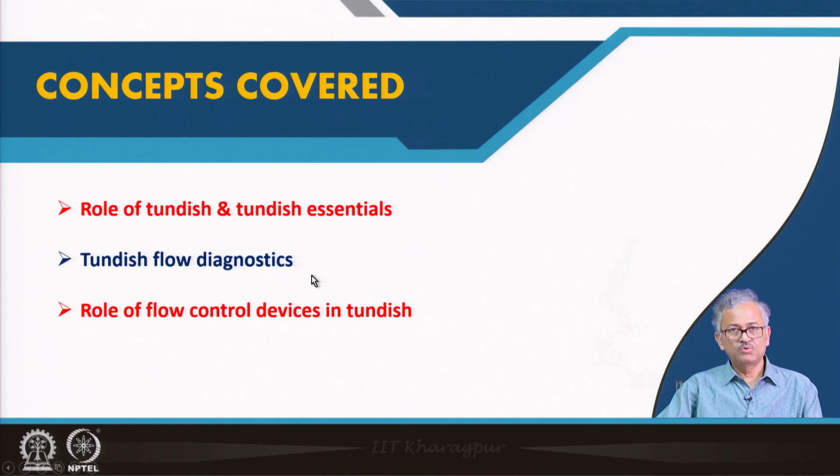The concepts I want to cover in this lecture are the role of Tundish and its essentials, Tundish flow diagnostics, and the role of flow control devices in the Tundish, because today Tundish is not only a receptor for the liquid metal, but it also has other functions like inclusion removal and providing the liquid at a constant superheat.

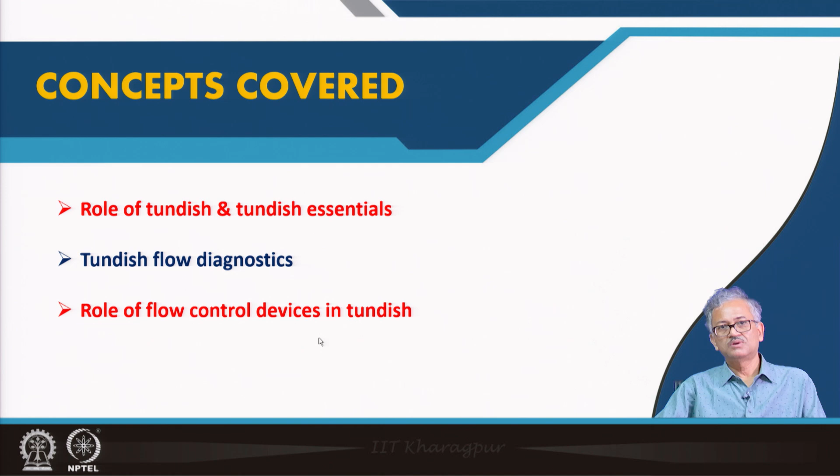So Tundish has now a new role because it is the last resort to remove the inclusions. That is why there are a lot of flow control devices in the Tundish, to control the flow such that we can effectively remove the inclusions.

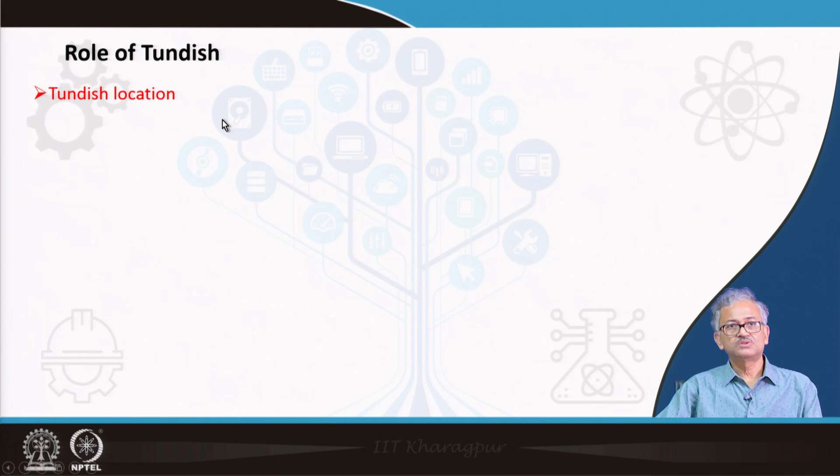So, the role of Tundish - as I said, first you see where the Tundish is located. Tundish is located basically between the teeming ladle and the continuous casting mold. It is in between these two that the Tundish takes place.

Why is the Tundish required? Because it is required to provide the liquid steel at a constant flow rate into the mold. If you change the flow rate, continuous casting - which is fixed with a constant heat extraction into the mold - will not be able to cast properly.

So flow rate should be constant, and that is why if you use the intermediate reactor, you can maintain the height of the liquid in the Tundish more or less constant. But if you directly feed the continuous casting mold from the ladle, the height level will change, and as a result the flow rate at the nozzle exit will differ.

That was the main idea - that is why the Tundish is used. Besides, the Tundish can feed a number of strands at a time. That is also another advantage of the Tundish.

But today the function of the Tundish is not limited to supplying liquid steel to multiple strands at a constant flow rate, but also to remove inclusions as much as possible, because it is the last resort, as I said, to remove inclusions from the steel.

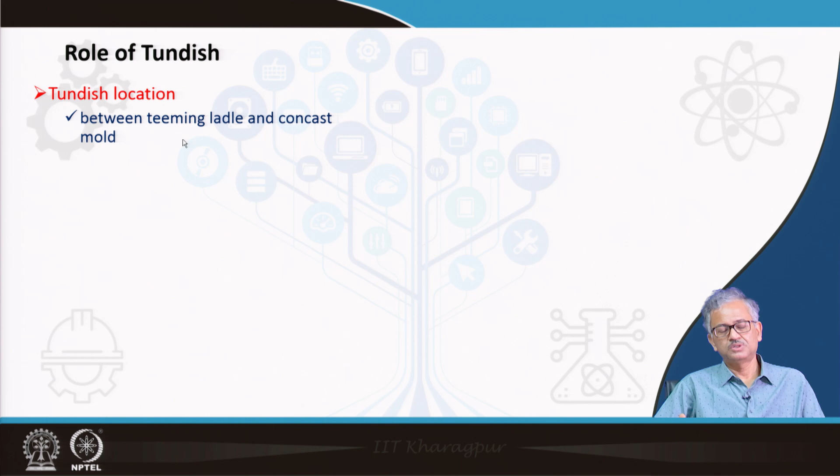Because if you have an open stream, there is a chance of air oxidation, nitrogen absorption, and all these things. This is essential because that will give rise to a lot of inclusions, and during casting a lot of precipitation will come - we do not want that.

That is why, after teeming steel, the inclusion removal station is only the Tundish, and after that it directly goes into the mold. So we have to be very cautious such that the liquid stream is not exposed to outside the inert atmosphere.

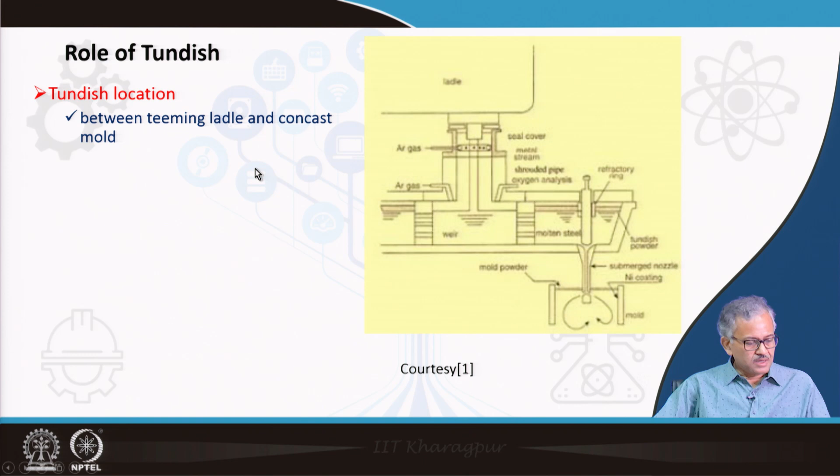So this is the Tundish. From the Tundish, you can control the flow rate to some extent by using what is called the Tundish stopper rod. I will come to that.

Now, that is the Tundish location we have talked about, and then the function is to maintain a constant liquid flow to the mold, as you know. For controlling the flow rate, besides the liquid height, there may be slight changes especially during the changeover of the teeming ladle.

So you can control the liquid steel also by refractory valves, slide gate, or the stopper rod like this. This is called the stopper rod. You can stop it when you do not want flow, or open the nozzle exit as you want, to control the flow rate if there is some problem with flow rate control.

During teeming, when you put the liquid steel from the teeming ladle into the Tundish, you basically maintain a constant height in the Tundish, because at the same flow rate at which liquid steel is emptying to the mold, you can pour it in. If there is a mismatch, then you can control it by the stopper rod.

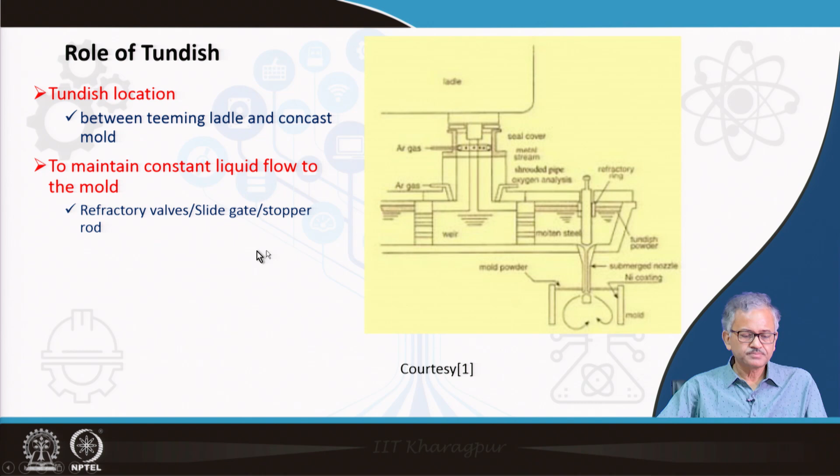Sensors are there to measure the temperature of the liquid coming out, the bath height (that is the tundish bath height), composition, and automated metering devices for input and output flow rates. So you can automatically measure what is the input flow rate and what is the output flow rate, and accordingly you can control.

So this control, sometimes if control is required, you can use this valve, slide gate, or the stopper rod for further control, because you have to maintain a constant flow rate. So this is there.

As I said, the tundish no longer just acts as a receptor supplying the metal at a constant flow rate, but also today it acts as an active reactor for removing impurities, because it is the last resort to remove the inclusions and deliver steel with uniform superheat. That is also very important, that is why temperature is also measured. But if you want to supply the liquid steel at a constant temperature at the exit, you have to maintain the proper flow rate inside the bath. That will come to that thing. So these are the additional functions today.

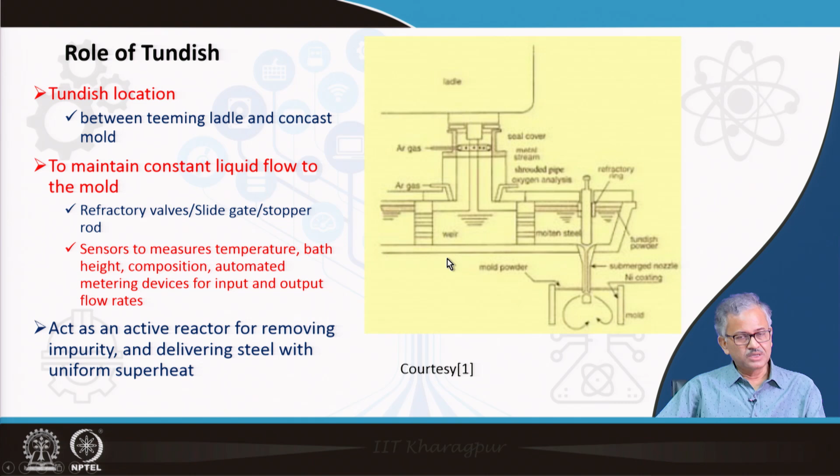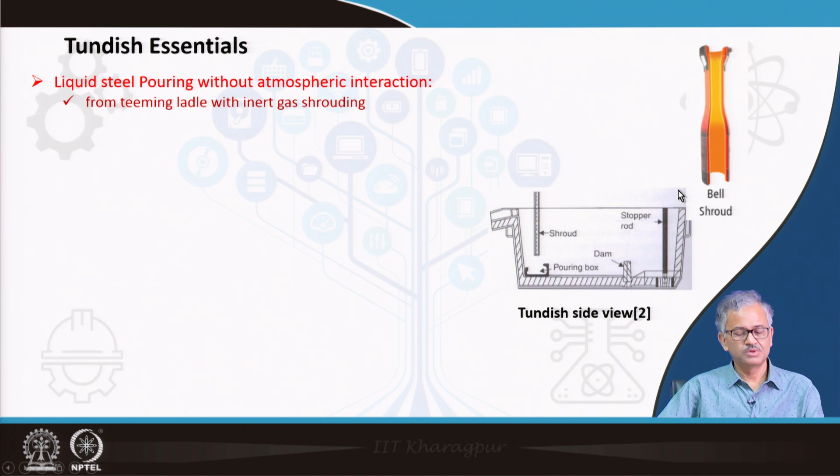Tundish essentials: liquid steel pouring without atmospheric interaction, from the teeming ladle with an inert gas shrouding. This is the shroud I showed you already in a better way, in the previous one. The shroud looks like this, it's a bell shroud, and the argon gas is pushed into it and liquid steel comes through inside the shroud.

Tundish lining: you can find there is a monolith lining. A permanent lining using bauxite and zirconia is there, just after the steel shell. In the tundish you have a layer called the permanent lining, made of bauxite or zirconia, and then you have a wear lining over it. You can find a monolith wear lining, not by brick but rammed material. It is monolith and basically made of a spray of 60 to 90% MgO, which is just sprayed. So it is a very MgO-rich monolith layer you can produce by spraying.

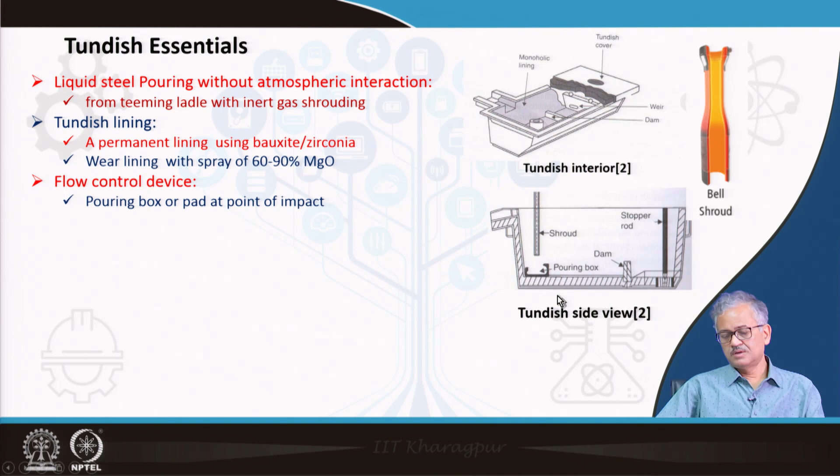Flow control device, pouring box: here is a pouring box. When you are teeming the liquid steel, tapping it from the ladle to the tundish, the liquid falls directly and will have a huge impact on the refractory, also creating a lot of turbulence in this region. So to damp that turbulence and also to avoid direct contact of the liquid stream with the refractory lining, you use a pouring box like this, or a pouring pad at the point of contact.

Then top slag: you have a top slag for basically thermal and atmospheric insulation. To restrict the atmospheric interaction, you use some kind of top slag or flux on the tundish top, such that there is not much atmospheric interaction, so that oxygen and nitrogen cannot come into the liquid steel. It acts as a barrier, as well as restricting heat loss, because you have to use some kind of flux that is also insulating.

Then absorption of non-metallic inclusions (NMI): this top slag also acts as an absorber for the non-metallic inclusions. When inclusions float to the top of the tundish, they should be absorbed by the slag. The slag properties should be sufficient such that it can immediately absorb whatever inclusion comes to the top. This is basically calcium aluminate slag with optimum viscosity used, because the viscosity also has to be maintained -- if it is too viscous or too fluid, it is not good. So you have to have an optimum viscosity, and it will also have other properties like favorable surface tension with the inclusion such that it can engulf the inclusion into it.

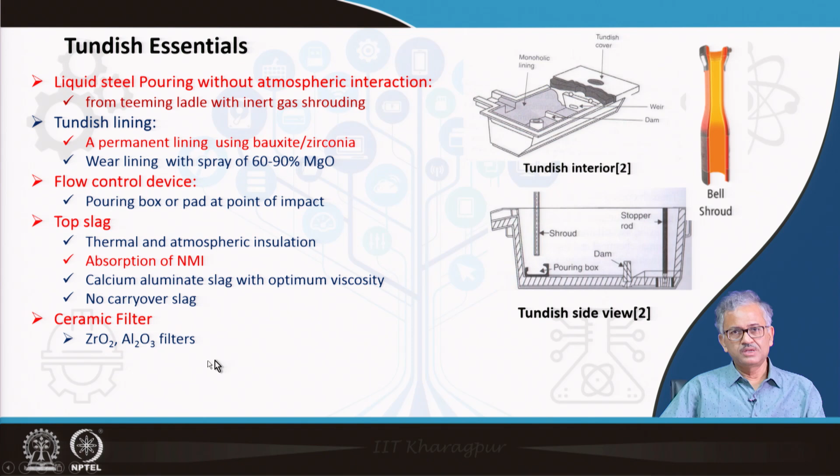Then ceramic filters can be used at the tundish exit, and they also arrest inclusions to some extent. Filters are usually zirconia or alumina filters, but the inclusions are much smaller compared to the porosity of these filters. So it is not like a typical filtering method where inclusions are not allowed to pass through these pores.

The inclusions can easily pass through the pores, but they get arrested in the filter because the inclusion gets attached to the surface of the pores. So even though the inclusion is much smaller than the pores in the filter, it gets attached to the pore wall and gets sintered at high temperature. That is how this ceramic filter arrests some amount of inclusion.

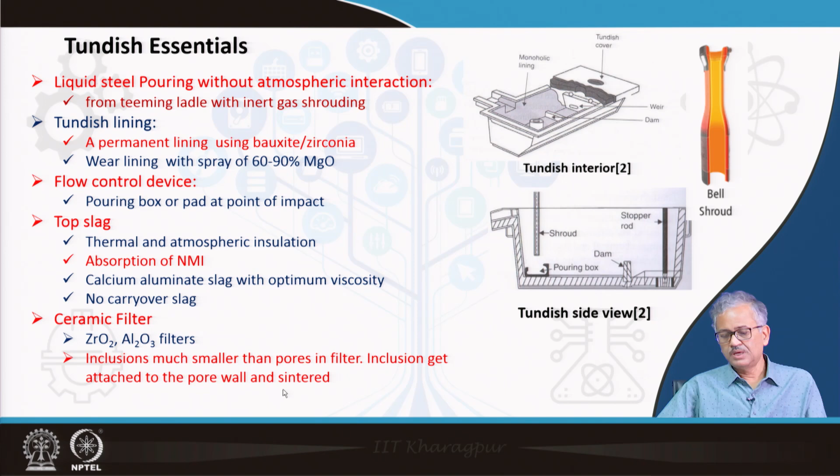So the tundish is designed with dams and weirs to develop favorable flow characteristics for enhanced tundish performance. Another aim is to direct the liquid steel through the top slag, giving inclusions the last chance to annihilate into the slag. So the liquid flow should move through the top slag and then come to the exit, and that type of flow pattern is only possible by some kind of plug flow.

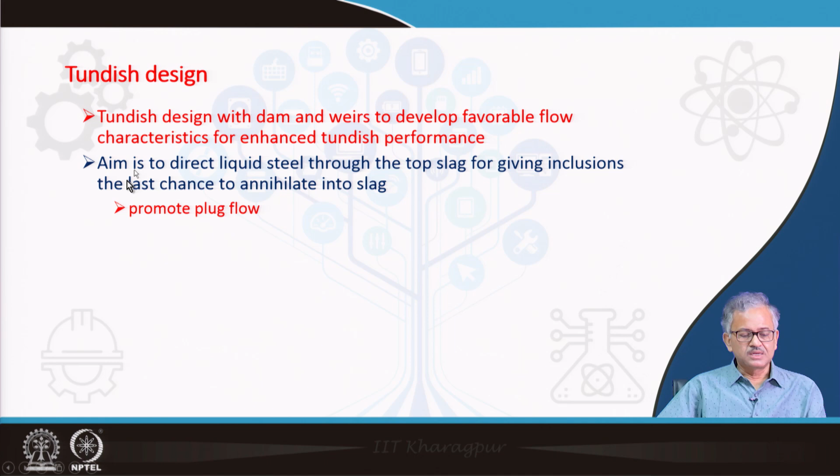Plug flow is one of the ideal flows - there is an idealistic flow called plug flow, which I will discuss later. Anyway, the aim of tundish design is to promote plug flow. In plug flow, the liquid moves such that all fluid elements move at a particular velocity, with a constant residence time, and they follow a particular path.

So you can make a plug flow such that the liquid steel moves through the top, in contact with the slag, and then comes to the exit. During their movement in contact with the slag, the inclusions will basically get removed. I will come to that.

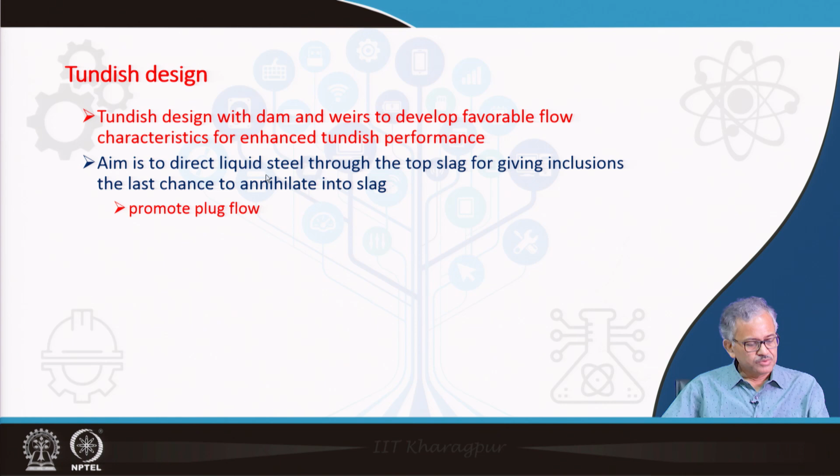Then eliminate the short circuiting of liquid and the dead zones. If some liquid, after pouring from the teeming ladle, directly comes to the exit stream, then it is called short circuiting, because some of the fluid elements can be arrested into the reactor in the form of a CSTR, continuously stirred tank reactor.

Basically, a reactor is a combination of a plug flow reactor, a continuous stirred reactor, and also a dead zone. So eliminating the short circuiting of liquid and the dead zone is very important. If liquid directly comes from the teeming ladle to the exit after pouring, that is called short circuiting. In that case, the liquid will leave with very high superheat, which we have to stop, and also this liquid won't get any chance for inclusion removal.

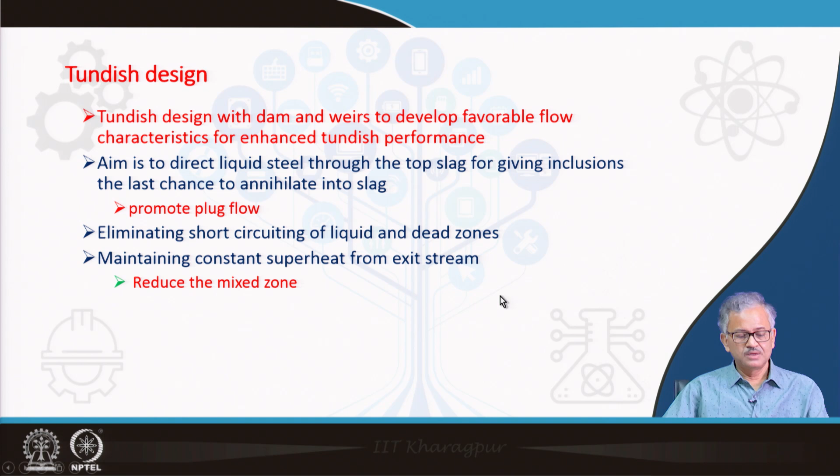Maintaining a constant superheat from the exit stream means you should avoid this type of short circuiting, and also reduce the mixed zone - that is also very important.

Because any real reactor is a combination of ideal reactors like the plug flow reactor. In a plug flow reactor, the fluid moves at a constant velocity, fluid element in a continuous flow, and so all the fluid elements in a plug flow reactor have a constant residence time.

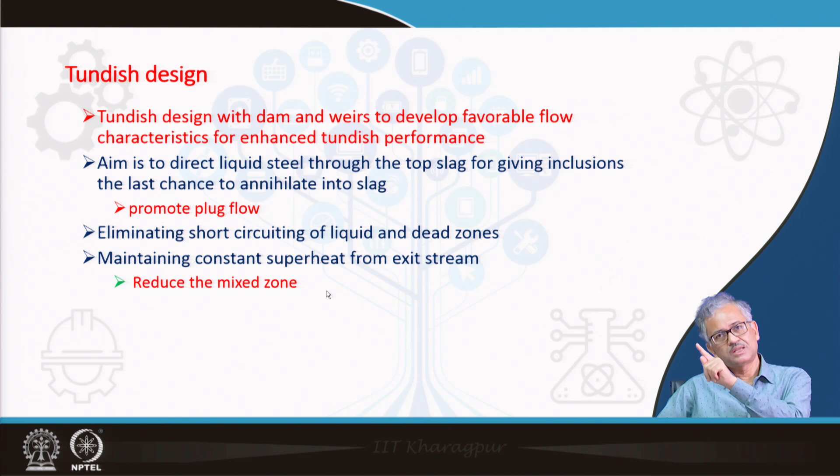In case of a continuous stirred reactor, there is a complete back mixing into the liquid, and the residence time of the liquid in a continuous stirred reactor has a wide range. Some fluid element can stay for a longer time, some fluid element can stay for a very small time. So from a continuous stirred reactor, liquid can come out immediately or liquid can come out after a long time.

As a result, whatever liquid comes out can have a high superheat as well as a very low superheat, because those that reside for a longer time will lose heat while staying in the reactor, and when coming out they will report at a very low temperature. So that problem is there in the CSTR, and that is also an ideal reactor.

So in a real reactor there is a combination of plug flow reactor, CSTR, as well as a dead zone. This mixed reactor is not good from a constant superheat point of view, because some fluid elements can stay for a longer time, and when they come to the exit stream they will give a very low superheat liquid.

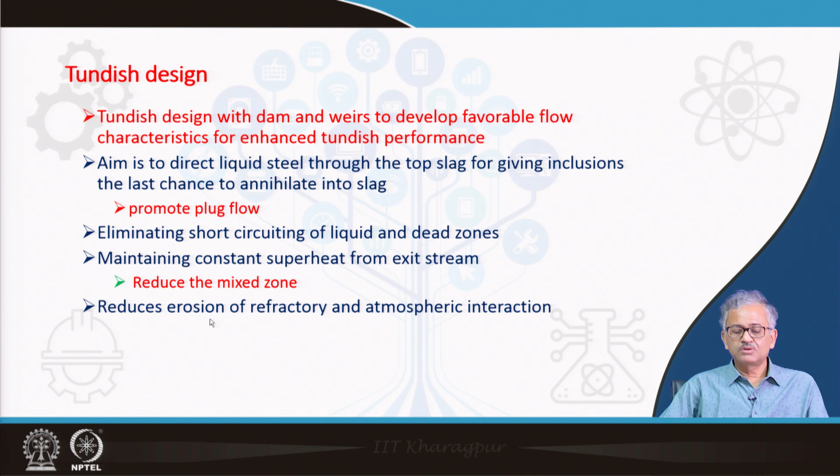And also reduce erosion of the refractory and atmospheric interaction. So you should design the fluid flow in such a way that it does not have much interaction with the refractory wall - that is, the shear stress at the wall should be as low as possible, such that you do not have much erosion, and also you can avoid atmospheric interaction by using the slag.

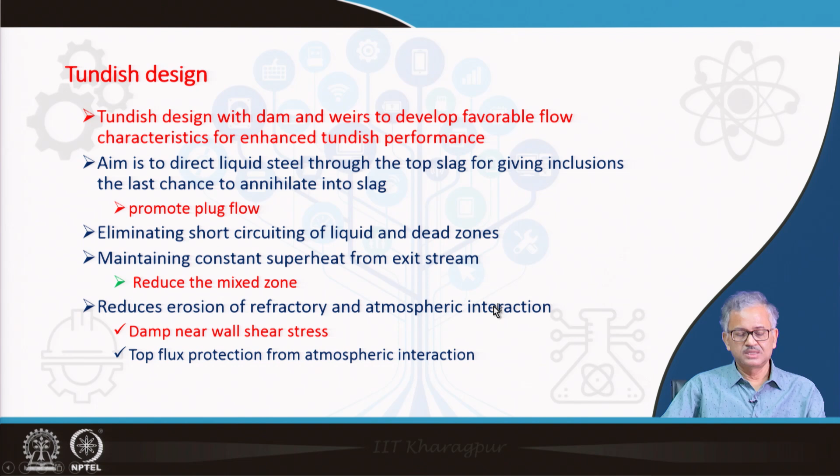And also dampen the near wall shear stress, as I said, and use top flux to protect from atmospheric interaction, as I said - that is also really required. So these are the aims. So these were the aims.

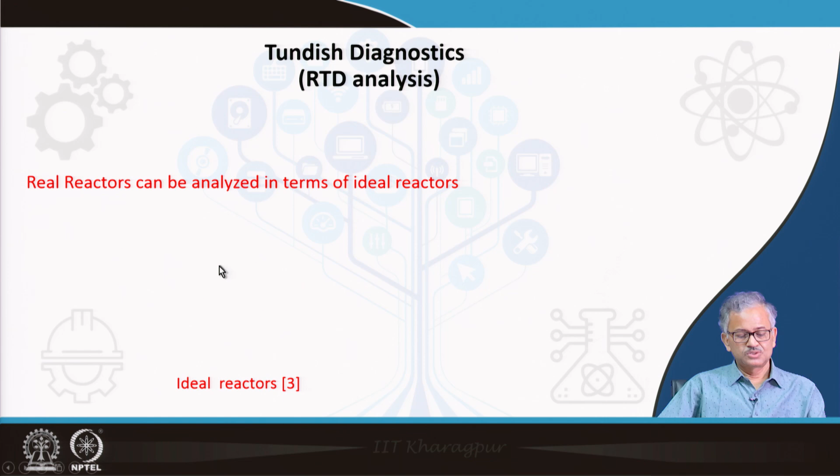Now I come to the Tundish diagnostics. Real reactors can be analyzed in terms of ideal reactors, as I said. So ideal reactors - this is the plug flow reactor, as I said. You can find all fluid elements are moving with a constant velocity.

So it is entering and coming out, and all the fluid elements have a constant residence time. This is an example of a CSTR.

These are basically stirred, and stirred in such a way that if you give some amount of tracer at the inlet, immediately the concentration everywhere will be the average concentration. So concentration gradient will not be there - it is continuously stirred, it is a continuously mixed reactor also, it is said mixed reactor, so ideally mixed reactor. So if you give some tracer, immediately it will be distributed everywhere, and the concentration everywhere is the average concentration. There is no concentration gradient inside.

Another thing is that all the fluid elements will not come out together. Some of the fluid elements come immediately, some come after a long time, and there is a distribution of residence time. So the fluid elements come with the distribution.

As a result, the liquid - if you consider the temperature of the liquid, it will vary with time, because heat is being lost from the walls. So if the liquid stays for a longer time, it will report to the exit stream with a lower superheat.

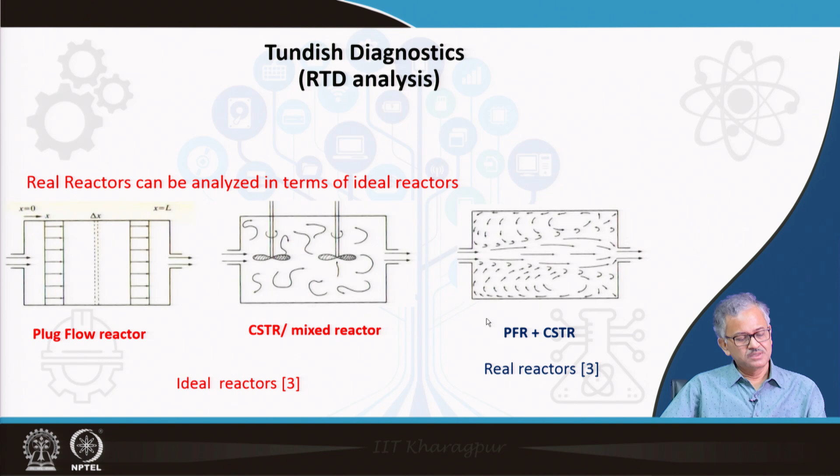A real reactor is a combination of these things. Suppose you have a plug flow reactor and a CSTR - it is a combination, and some dead zone is also there. What is called a dead zone? Where the velocity is very less, say 5 orders of magnitude less than the average velocity - that is called the dead zone. There, basically, the liquids are not moving.

So in the Tundish diagnostics, what is the aim basically? People estimate the relative volumes of the plug flow, CSTR and the dead zone from the actual C curve. Basically, you have some curve called the C curve, and you can analyze the C curve.

The C curve is basically - if you analyze the exit concentration, you can add some amount of tracer, and at the exit you can measure the tracer concentration with time. Then, if you plot the dimensionless concentration against the dimensionless time, the curve you get is called the C curve.

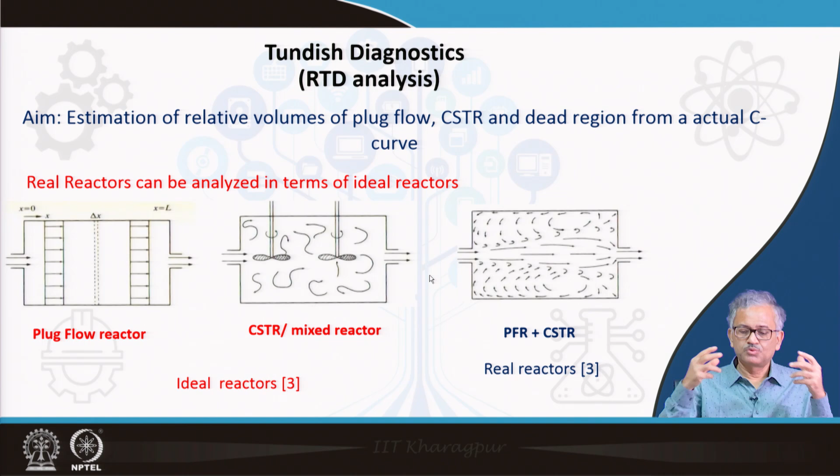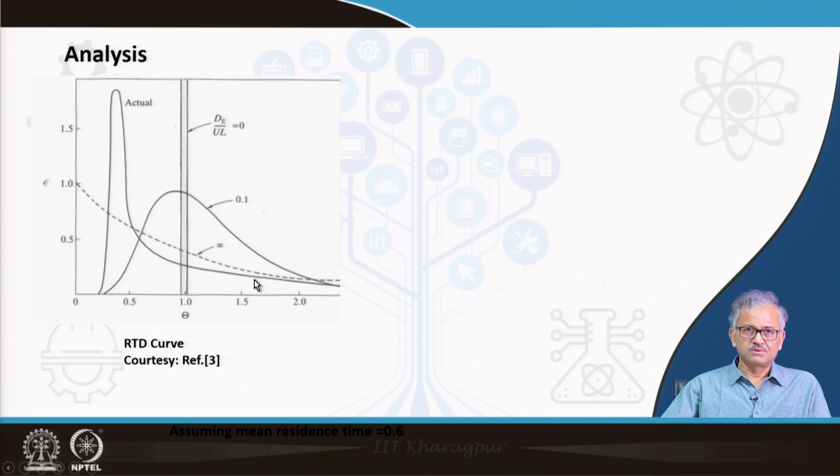And these are all actual reactors. You can find this dispersion number is 0.1, the curve looks like this, and it contains obviously a combination of plug flow reactor and CSTR. If you see this curve, it shows there is a significant amount of plug flow reactor behavior - this is the signal of a plug flow reactor. After that it also contains some portion of CSTR. So now we will calculate what is the amount of plug flow and so on.

So, that is theta p. You can find the first concentration appears at a dimensionless time of 0.25. At 0.25 you get a spike, before that there was no concentration. That means a certain portion is a plug flow reactor, so theta p is 0.25. I am just analyzing this curve - at 0.25 we find theta p, the plug flow reactor dimensionless time.

So, this is defined as Tp by T bar. T bar is basically the nominal residence time. How do I define the nominal residence time? Total volume divided by the volumetric flow rate, because in any continuous reactor, you are continuously feeding fluid from one end, and it comes out at the same rate from the other end - Q is the fluid volume flow rate, both input and output. So Q is the volume flow rate into the reactor, and V is the volume, then V by Q is the nominal residence time.

And Tp, how do you define that? Tp is the plug flow residence time, defined as the volume of the plug flow divided by the volumetric flow rate. So then theta p becomes Vp by V, that is equal to 0.25. I get one equation that correlates the plug flow volume to the total volume. Now I need to get some other equation.

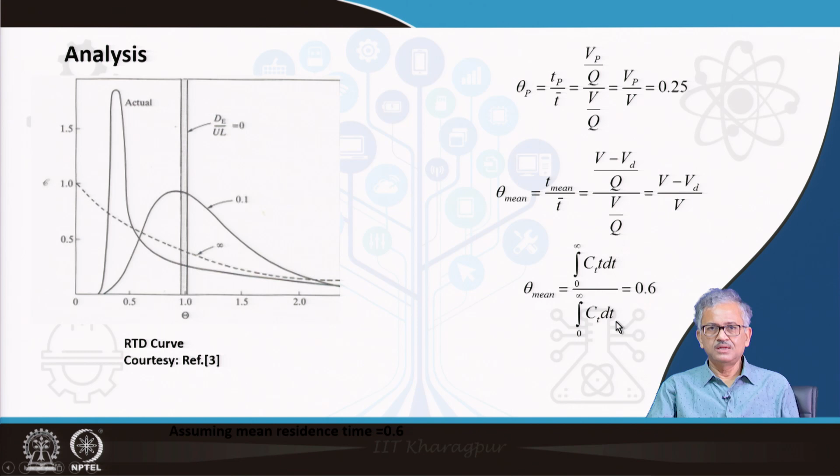You can simply get it because Ct you have as a function of time in the exit stream. So you can integrate it and divide, you will get 0.6, because you know the entire exit stream. So you can calculate this theta mean and put it in.

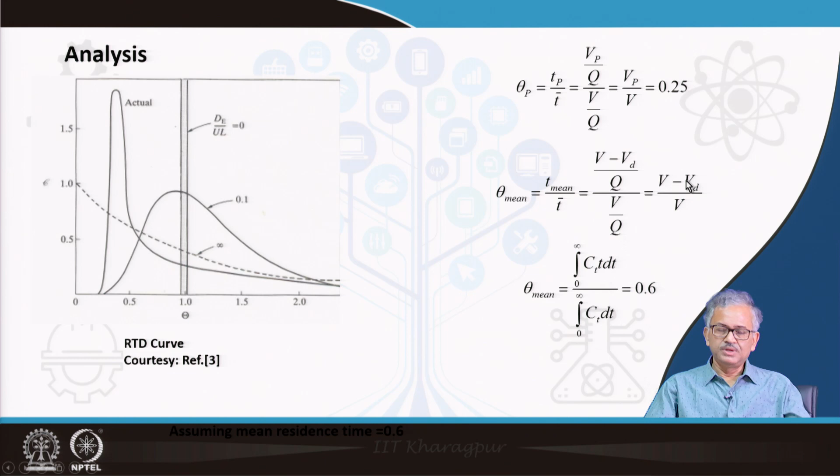Now we have two equations. This equation correlates V and Vd, and this equation correlates Vp and V. From that I can calculate Vp and Vd, and then I can calculate Vm. Mixed volume is 1 minus 0.25 minus 0.4.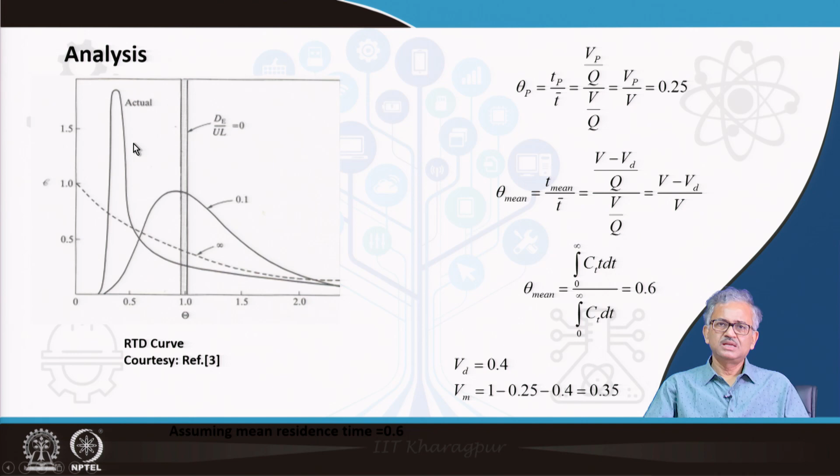So this way I can analyze it. I am just telling you, this is not something I have gone through very rigorously, so it will not be a part of the course, but for your understanding I think it was required to show how people do this. This way you can identify what proportion of plug flow, mixed reactor, and dead volume are present in an actual real reactor. This is called flow diagnostics.

I can measure the flow diagnostics simply by a tracer experiment and measuring the exit concentration with time. Now this is very important: predicted flow pathlines in the tundish without dams, at steady state.

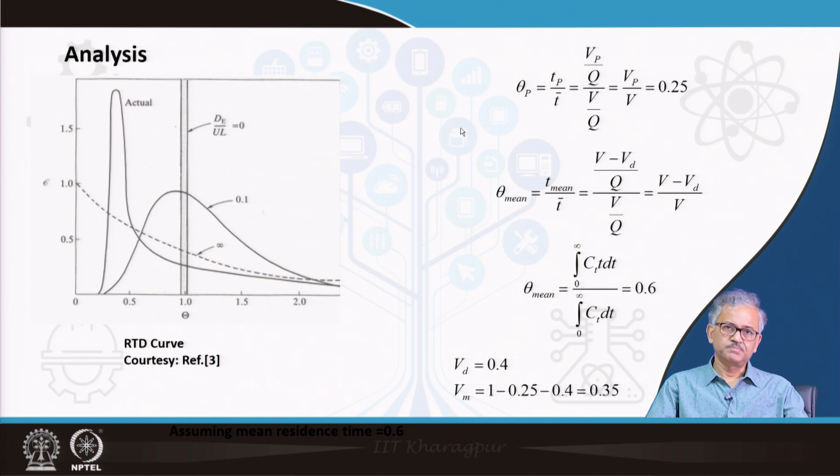These are without any baffles, in a standard setup. You have a tundish and your liquid stream is entering at this point. There is no, what is that called, no baffle there, so there is no turbulence arrestor here. So huge turbulence is created.

You can find two mixed zones created around this liquid stream in the tundish. You can also find that a part of the liquid joins this way directly, that is called short circuiting. The liquid gets short circuited: after being poured into the tundish, it directly moves to the exit stream, that is called short circuiting.

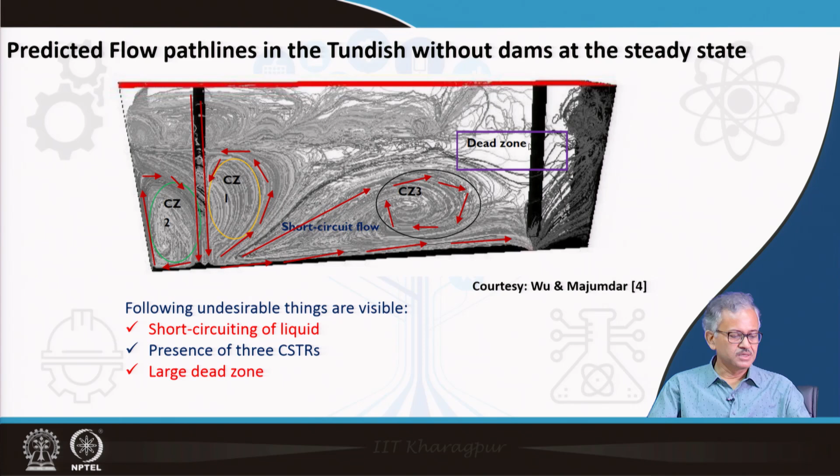So now, improved design of tundish with effect of slotted baffle and dam. You can find I have now put one dam here. Dams with slots are there, dams with holes here basically.

Some nozzles are there, dams with holes, and this is a slotted dam here, but its height is much less compared to this. And obviously here some pad is there to control the flow. So now you can find this.

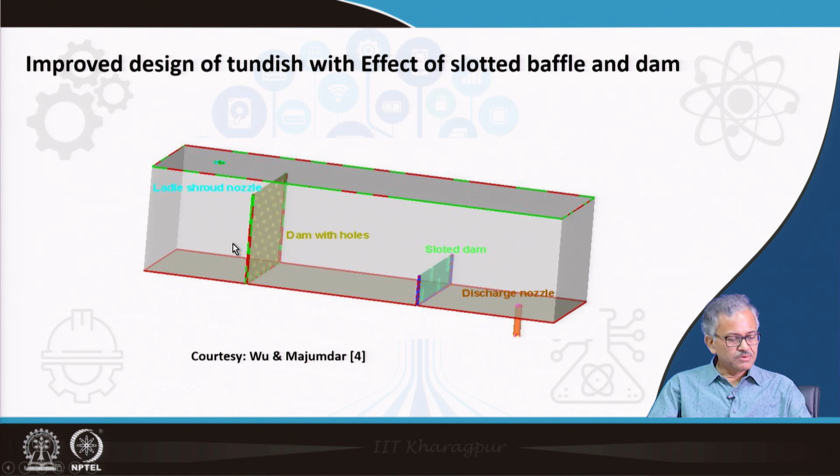Now you can see the flow paths, how the flow paths have changed after using these dams. This dam is there, two dams are there: one is the dam with holes and taller, and there is the shallow dam with slotted holes.

What you can find here is that the liquid is moving much more in a plug flow manner. You can see liquid moving with a constant velocity and then coming out. And when the liquid is there, still, when it is coming this way, then inclusions will have a chance to go into the slag, and all are moving with the plug flow at a constant velocity, coming to the exit stream.

So all the liquid fluid elements will report to almost constant superheat. There is no short circuiting. So liquid is coming, then moving up, and then coming out. Short circuiting has been eliminated. So the change in liquid temperature at the exit stream is supposed to be less.

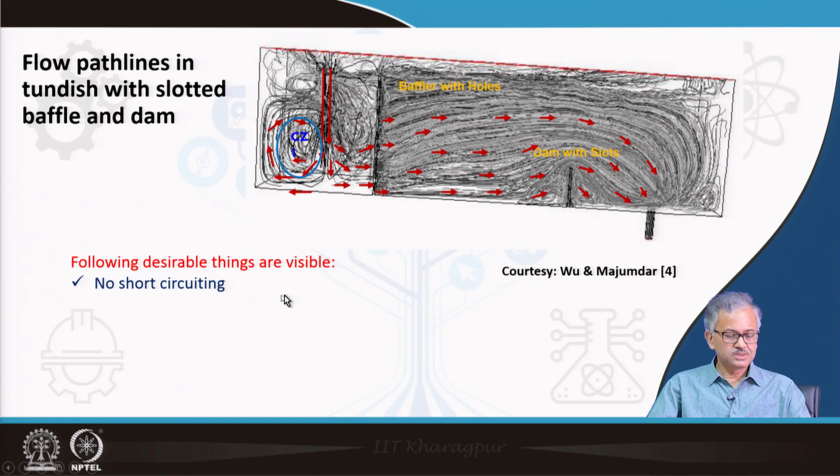So the following desirable things are visible: one is no short circuiting. Second is a well designed plug flow to direct the flow towards the top slag, to facilitate inclusion removal, and reduction in CSTR and dead zone, which will reduce the chance of delivering liquid at different superheat.

So if the liquid moves this way, that is a reduction in CSTR. If you have less CSTR, the liquid will report at a particular superheat at the exit stream. And if dead zone is not there, then you are saving some space in the tundish and can increase the productivity.

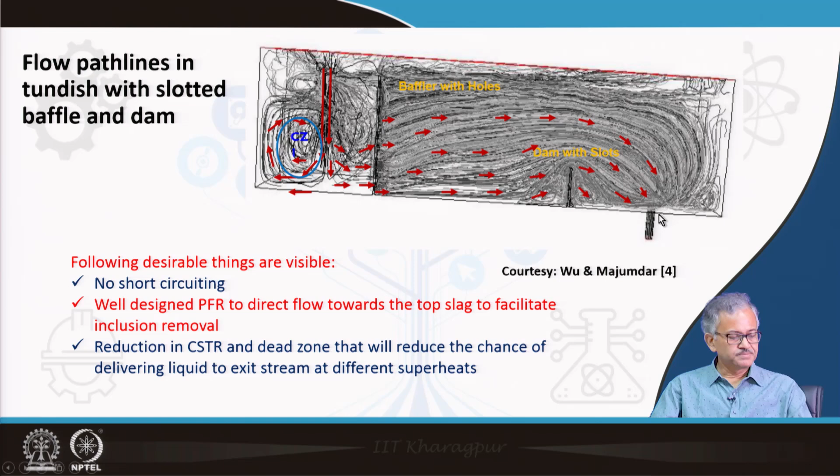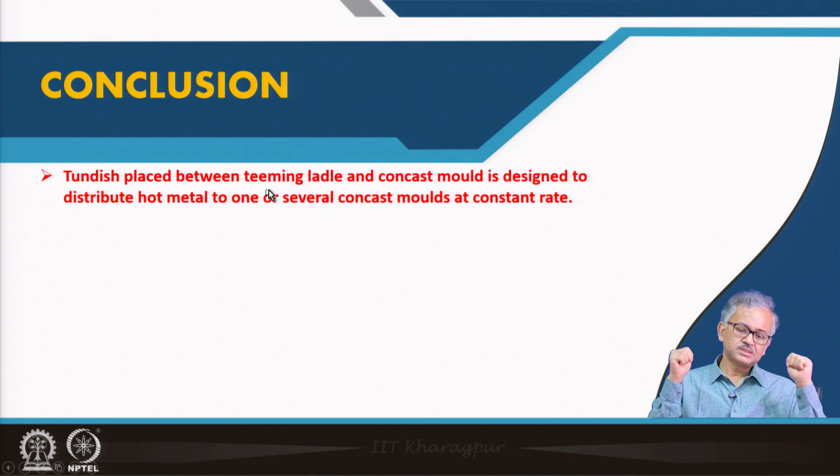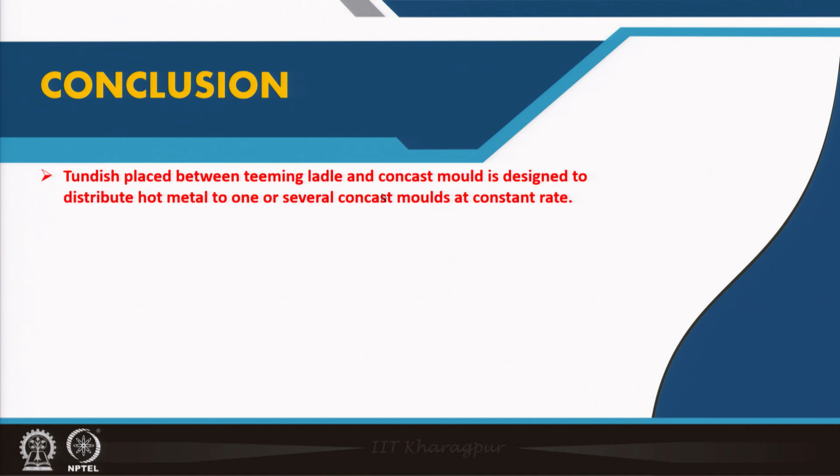So what we discussed in this case is that the tundish is placed basically between a teeming ladle and the continuous casting mold, and is designed to distribute the hot metal into one or several continuous casting molds at a constant rate. As I said, the tundish initially had a role to supply liquid steel at a constant flow rate to a multi-strand, if required.

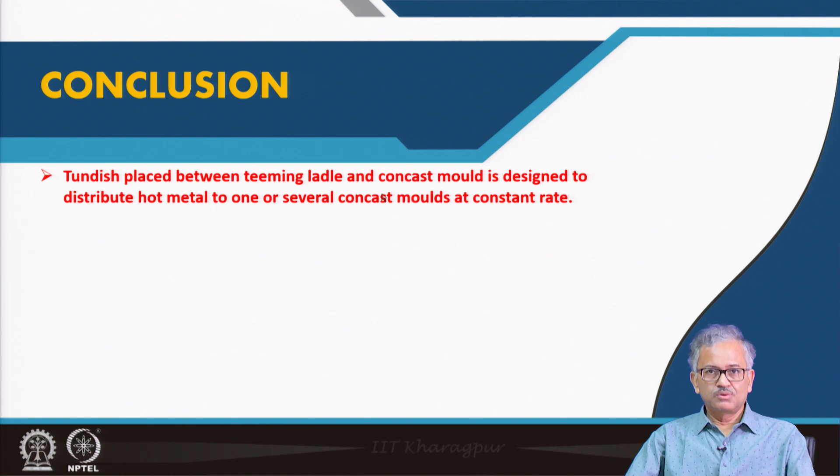But today we have other roles also. With more emphasis on the quality of steel, it has far more important function on inclusion control than originally envisaged. So initially it was envisaged just to supply liquid steel at constant flow rate to a multi-strand. Now it is not like that.

Now the tundish acts as an active reactor for inclusions. It removes the inclusions and has a lot of provision for flow design, such that you can introduce more plug type flow into the reactor, diminish the mixed reactor portion in the tundish, and eliminate the dead zone in the tundish.

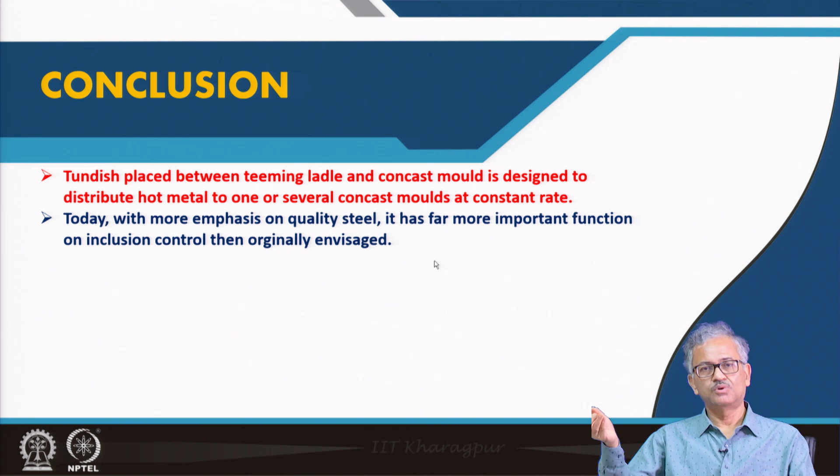That you can do by controlling the operating parameters and the flow diagnostics. You can use flow diagnostics to know the proportion of different reactor zones and then improve it. How can you improve it? Using dams and weirs in the reactor. If you use dams and weirs, you can definitely improve it, and you can use flow diagnostics to observe how much improvement has taken place.

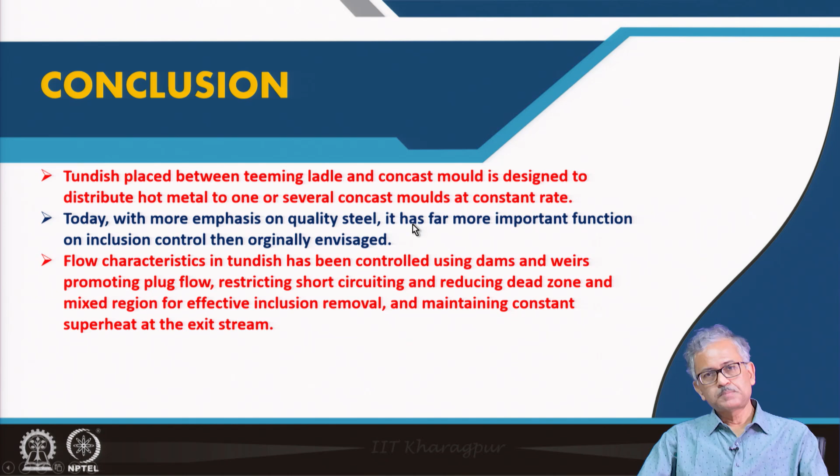So what is the flow characteristic? As I said, we should promote plug flow into the tundish such that the liquid reports to the exit stream at a constant superheat, and since the plug flow moves towards the slag, it also gives a lot of chance for inclusions to be absorbed into the top slag. Also, we should minimize the CSTR and the dead zone as much as possible.

So these are some of the conclusions. Thank you.